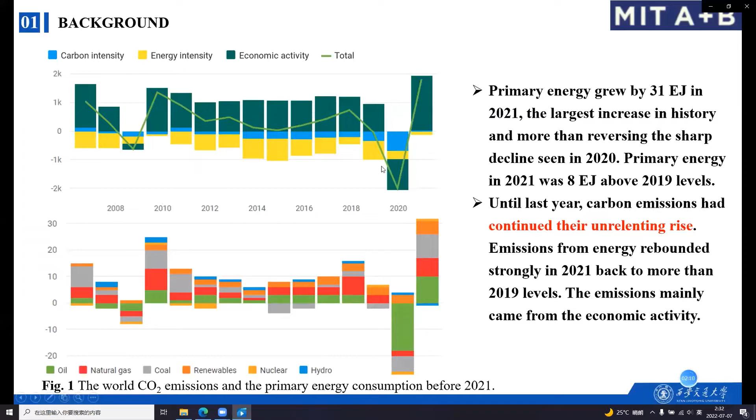Emissions from energy rebounded strongly in 2021 back to more than 2019 levels, and the increase in the carbon dioxide emission was mainly driven by economic activities. Because of the increase of carbon dioxide emissions, global warming and other related problems have been worse and worse. In order to solve these problems, many countries had promised carbon neutrality and made policies to accomplish it.

From the picture, we could see that there were two countries which had finished carbon neutrality, and many countries promised to finish this target by 2050. As far as China was concerned, all Chinese people tried their best to accomplish carbon neutrality by 2060. One feasible method to decrease the carbon dioxide emission and alleviate the energy scarcity is to develop renewable energy, such as wind energy, solar energy, and hydropower.

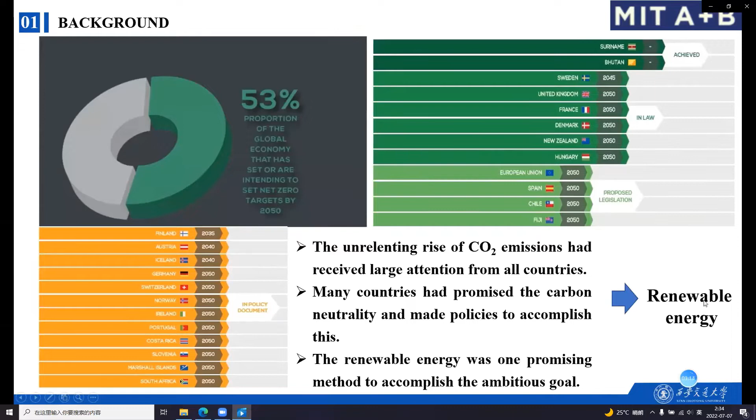Among these renewable energies, solar energy was one promising renewable energy because it is very abundant and its wide spectrum was suitable for many fields. But there is one drawback: solar energy is limited by the weather or the Earth's rotation. So, developing solar energy storage is one applied method, and heat storage is divided into latent heat storage, sensible heat storage, and chemical energy storage. In this research, we chose latent heat storage thanks to its larger heat storage and isothermal characteristic during the charging and discharging process.

And Figure 3 describes the heat storage system. The upper picture shows an actual large-scale heat storage with molten salts, and it was one high-temperature heat storage system. The lower picture shows a small domestic heat storage system. It was used for daily hot water in our home.

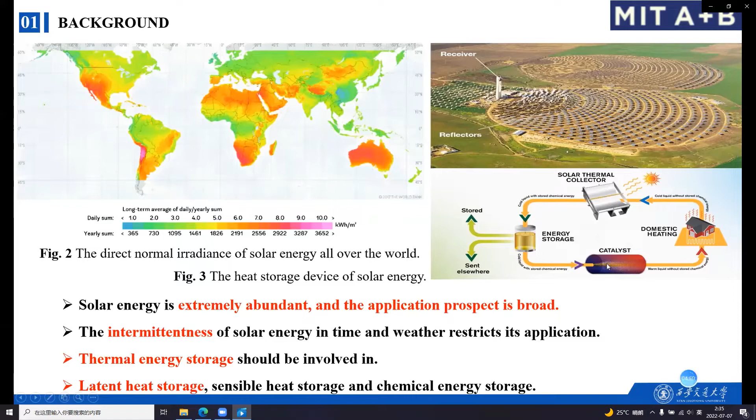But there was one problem during the melting process: the melting performance was uneven. The PCM in the upper region melted faster than the PCM in the lower region, and the PCM in the lower region prolonged the full melting time. Additionally, the unevenness of the temperature in the high temperature heat storage would cause thermal stress, which will affect the use of heat storage.

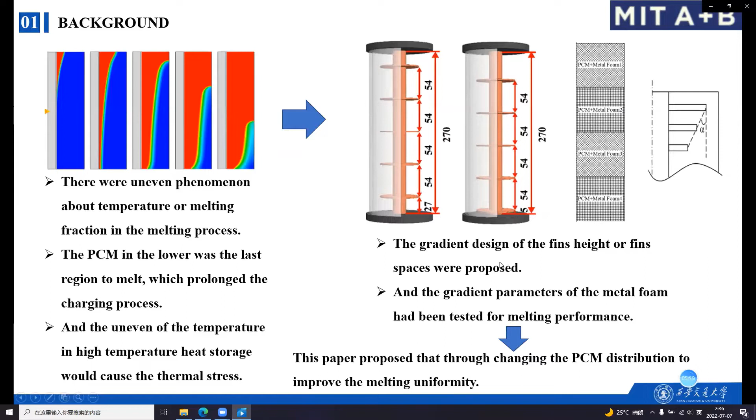In order to solve these problems, the gradient design of the fin spaces was proposed, and the gradient parameters of the metal foam had been tested for melting performance, such as the gradient porosity and the gradient PPI. Except for the above methods, this paper proposed changing the PCM distribution to improve the melting uniformity.

And the second part is the numerical model. Figure 4(a) shows the physical model and its application area. The solar absorber collected the solar energy, and the heat is transferred by the heat transfer fluid to the heat storage and stored in the heat storage. The heat storage consisted of the proposed heat accumulator units, and this paper selects one unit to analyze the thermal performance, and different proportions of radius, the upper radius and the lower radius, were designed, and their sizes were displayed in this table.

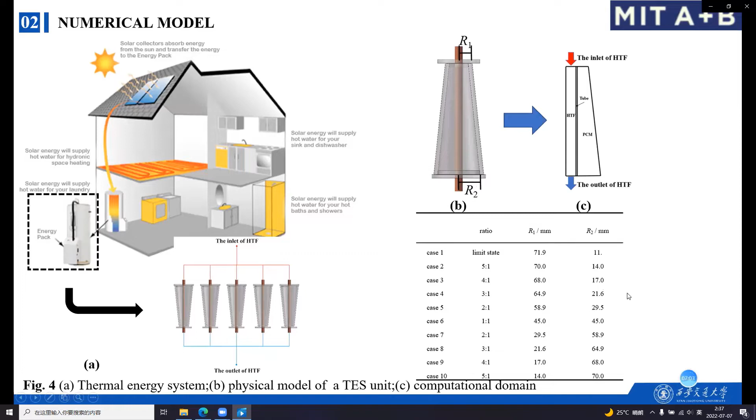The third part was the numerical calculation results and discussions. The first picture shows the full melting time of 10 cases, and case 6 was the basic case, whose full melting time was 28,290 seconds. The best case was case 3, having a full melting time of 17,210 seconds, saving the melting time by 39.17%. And as predicted before, the cases with more PCM in the lower part all prolonged the full melting time.

But we could conclude from the picture that if we increase the PCM in the upper region excessively, it will prolong the full melting time too.

And the sixth figure depicted the detailed changes of each case during the whole melting process, and the result showed that the melting fraction curves of the 10 cases coincided before about 500 seconds. This was mainly because at the beginning of the melting, only the PCM near the copper tube was heated up by conduction and melted. Therefore, the different distribution of PCM had no effect on the melting of PCM. So the melting fraction of each case was almost the same.

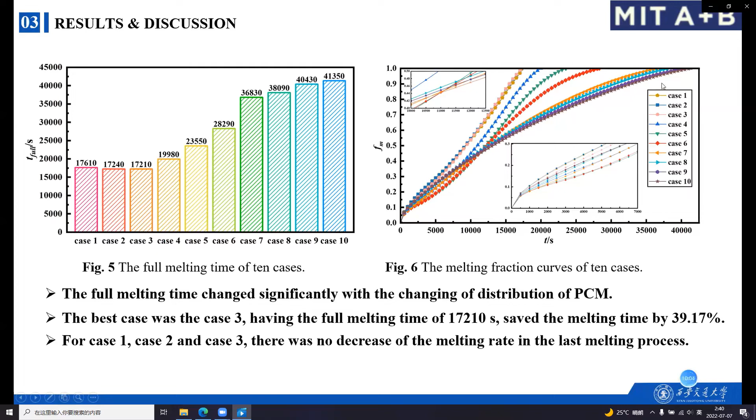So the curves coincided. From 500 to about 7,500 seconds, the melting fraction curves of 10 cases showed a great difference, among which case 2 melted fastest, case 6 melted slowest, and the difference between two cases was large. It should be noted that for case 1, case 2, and case 3, there was no decrease of the melting rate in the last melting process, but for other cases, there was a decrease of the melting rate in the last melting process.

And the next was the melting interface. From this picture, we could conclude that the melting interfaces of different PCM distribution also had a significant difference. At 1000 seconds, for case 1 to case 4, there was a small molten area in the lower region. Because under larger proportion, there was an area having little PCM, which needed a little heat to reach molten state.

Additionally, for case 1 to case 4, at 8000 seconds, the liquid area near the copper tube was large, which was conducive for convection. And through changing the proportion of PCM, the last melting area changed from the lower region to the middle region.

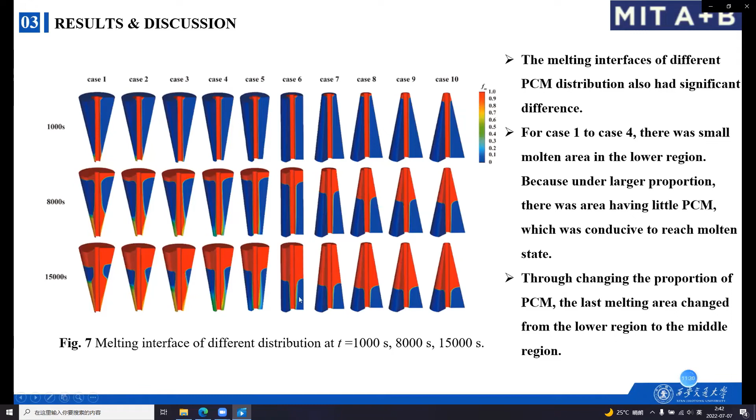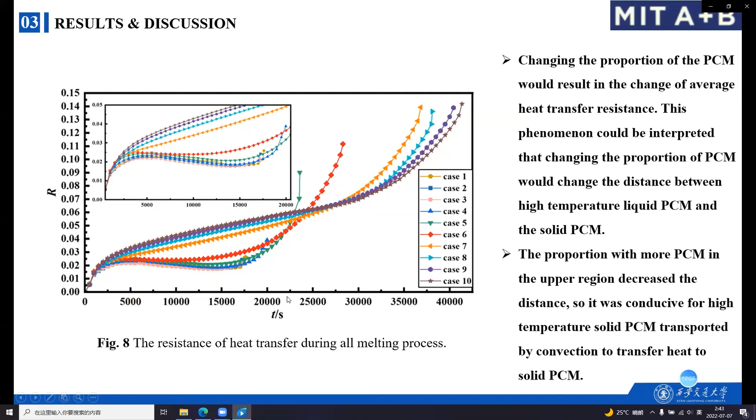What's more, changing the proportion of the PCM would result in the change of average heat transfer resistance. This phenomenon could be interpreted that changing the proportion of PCM would change the distance between high temperature liquid PCM and the solid PCM. Because of the existence of natural convection, the high temperature liquid PCM always exists in the upper region of the heat storage, and the proportion with more PCM in the upper region decreases the distance. So it was conducive for high temperature liquid PCM transported by convection to transfer heat to solid PCM.

And the final part was the conclusions. From this research, we could get 3 conclusions. The first conclusion was that, compared with the basic case 6, the best one, case 3, with a full melting time of 17,210 seconds, had reduced by 39.17% through changing the proportion of PCM in the upper region and the lower region.

The melting interfaces had changed. There was molten area in the lower region in case 1, case 2, case 3, case 4 in the melting beginning, and at 8000 seconds, the liquid PCM near the tube in case 1, case 2, case 3, case 4 was larger than other cases, which was conducive for natural convection. And the last melting area of these cases changed from the lower region to the middle region.

And changing the proportion of the PCM would result in the change of average heat transfer resistance. For optimized cases, the thermal resistance decreased, so there was no decrease in the melting rate during melting process.

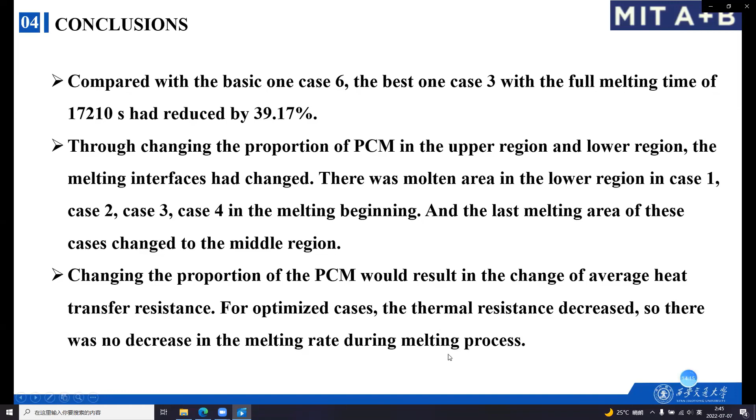Oh, hello, Professor. Thank you for your presentation. Yes, I think we have a question in the chat box. Can you see that? From Zhou Wei Chen. Oh. Would you like to take this question? Okay, thank you for your question.

And your question was a tricky one when I was doing my research. As you have mentioned, for the truncated cone, when the two-dimensional area was the same, the three-dimensional volume was not the same, which was different to the cylindrical storage. And in order to ensure the PCM quantity of all cases, in this research, we calculated the size of the heat storage tank with the same PCM in three-dimensional volume. And when we built our two-dimensional model, we all used these sizes under three-dimensional calculations.